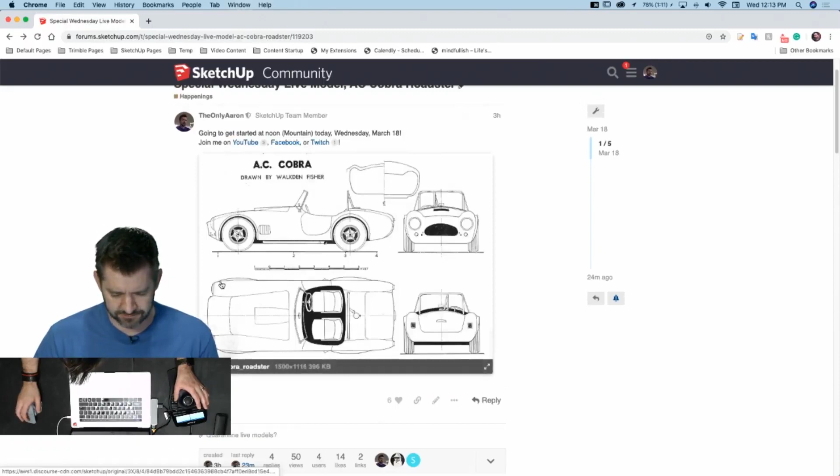So with that, let's hop in and let's model some stuff. I feel like I had something else really, really super important to say, and I forgot what it was. But well, we'll come back to it, whatever it was, at some point, maybe. I don't know, we'll see.

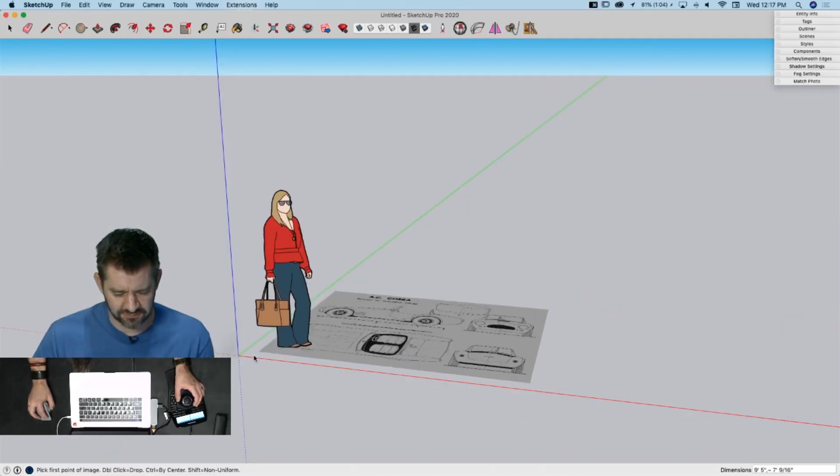All right, so I'm going to import this. I'm just going to put it in here nice and big. I'm not really worried about high definition image — this was a fairly low definition file to begin with, and screenshotting it didn't help that. So I'm not worried about optimizing or making this the highest possible resolution. All I'm really looking for is some curves, and I have some real basic dimensions right here. So this is good, this looks good.

I'm going to start by scaling it. I'm going to draw a line right here from 0 down to 6 feet. I'm going to group that line and drawing together, go into that group, use my tape measure tool on that line I just created, and tell it that is 6 feet. Resize it, yes — ooh, I was pretty close, that was a close one.

All right, so I'm going to take that now. I'm going to make a copy of it and go to the middle point. Option rotate to get it upright like this.

Option rotate here. All right, so these are really the three pieces that I'm interested in.

I'm sorry, Laura, you gotta go. See ya, thank you for coming by.

All right, so these are really the three views I'm interested in using. This is what will make up my image cage, my inference mapping here.

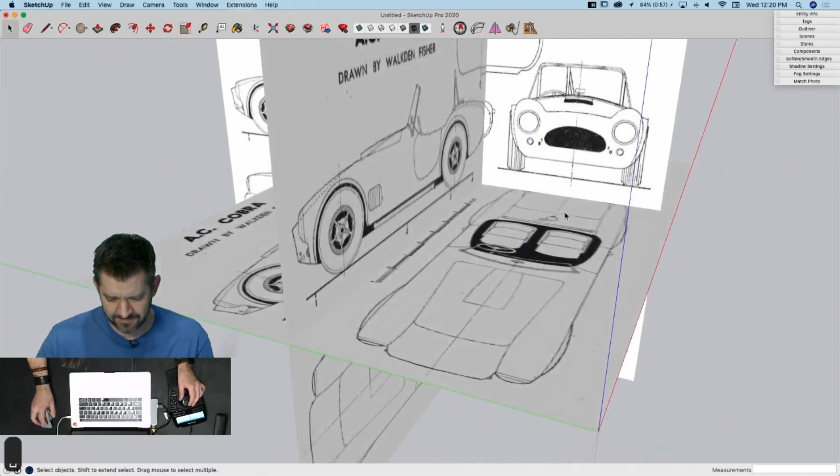What's that? I said, although it's still nice to be perfect. I'm a fan of perfection, I just don't like to require it of myself. I like to hold myself to a lower standard.

I'm going to take all of these images then, and I'm going to explode them. Oops, they're too deep, I'm going to explode them again, and that's just going to give me surfaces.

So with a surface, I'll just go grab all these, say intersect with selection, and now I can grab this one, make it its own group. Grab this one, make it its own group. This one I have to break a little bit more, like that.

Okay, and then I'll have to cut it off. Oh, I'll have to cut off a lot more. Get rid of all these extra lines then, because really all I want is those three pieces there.

All right, there we go. And I'm going to take all of these images and tag them as ref.

So I'm going to add, and this is just something I do, you guys have probably seen me do this before. That way it's real easy for me to turn those on and off as I start modeling, so I don't have to go toggle them or anything like that.

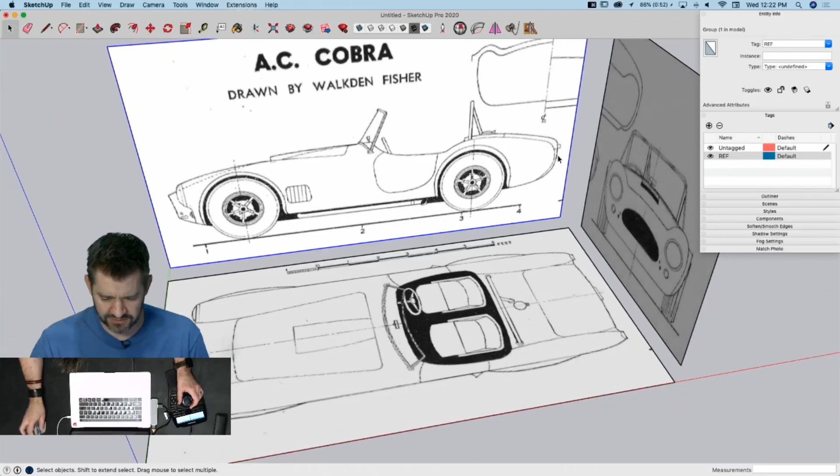Okay, so let's talk about the goals here. I don't really have a goal here, I'll be honest. What I'm really looking to do is, when I saw this, the cool thing about it is the body shape, right? It curves in almost every direction. Very cool, so that's going to be the challenging part, getting that body together.

Over on our forum, we did have a post from Tangle, who might be on here, he joins us on the live streams every once in a while. Tangle posted his modeling of, I don't know if it's the same one, nope, it's a Shelby Cobra. But he actually started from the frame and worked his way up.

That's impressive. I was not planning on doing the frame, to be honest. In fact, I'll probably get just enough to stick a wheel underneath. Like I said, my big goal is the body here. I think Enrock too posted that she was working on one as well.

So a question came up if I will draw this with quad modeling. You guys know I am a fan of quad modeling. My temptation here was to actually see how much I could do with native tools before I went into quads and started subdividing. Because I'm kind of feeling a little bit of what I felt with the fighter jet we modeled.

Very similar shapes. Sound isn't too good, hold on, I can make myself louder. I don't know if it'll be better. It's a little different this time because normally the room I'm in is insulated for sound, but I'm sitting in a garage this time, so I apologize if it's not as solid a sound as usual. I can turn up a little more, but I'm going into the yellow there, so yeah.

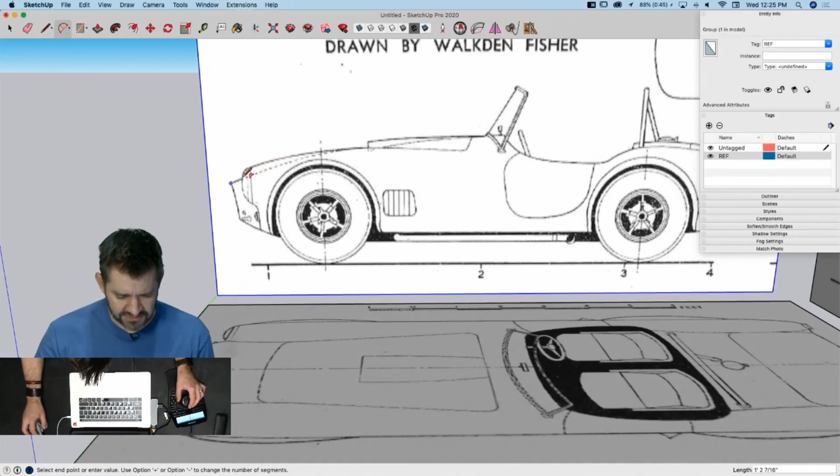So I'm going to go ahead and start by drawing the profile of the main part, this middle section. And you can see I fortunately have these real nice little dotted lines to follow. So I wonder if I should try to take that all the way back. Is that one continuous arc? No, not quite. So I'll go from here down to here.

Oh, I see it's not even a... okay, that's this piece right here that kind of tucks in and goes down. So we'll maybe cut that out. I don't know, we'll see what happens. Oh, so many unknowns.

All right, then this goes under to about here or so, and then goes straight across. Let's go to the middle of the tire. I don't know what's happening here. All right, and then this comes out to here, and then I'll grab an arc.

So this is probably, I would go about that far, and then this is where I would switch. I will switch to Beziers because Bezier is going to give me a lot more control over these arcs. And from there it looks like a little straight section, and then I will go to another Bezier, put one here, and go from here. I think I can do all of this in one curve.

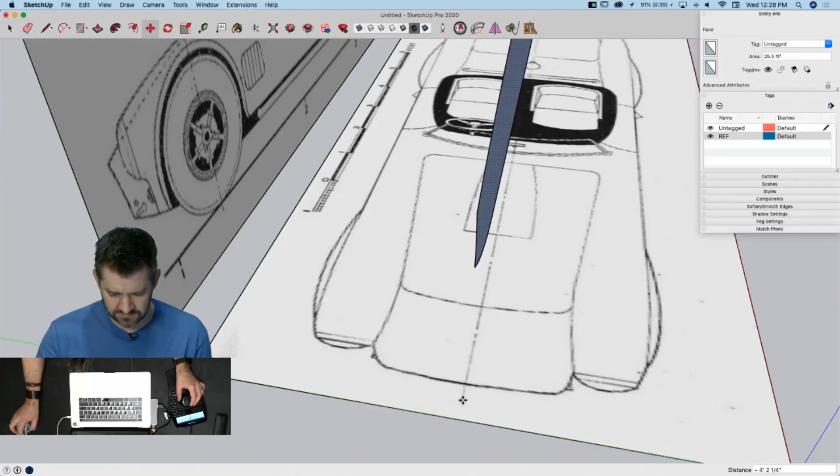Man, all right, so I'm gonna bring that over. Stick that right here in the middle. Okay, so what I gotta do now is I gotta get that to kind of billow out on either side. Yeah, that's pretty good. I'm gonna call that for today, we'll come back and fine tune it next time.

So yeah, so the next thing is to get this arc. So I see a couple pieces. So here, I'm gonna think out loud, and that is it, just because. That's that arc. Right down here, I'm gonna put a vertical line right down the middle. Here we got this going across like this.

Starts off that way and goes this way.

Bezier is great - I saw someone say they've never used Bezier before. It can be a little intimidating the first time you use it, and I get why not everybody leaps into it right away. But it really is a good tool that gives you a lot of control over an arc. You do have to play with it a little bit, use it to get the hang of it. The first couple times you use it, it's going to feel really awkward, like you're doing something wrong. I think that's just learning - that's not the only thing that's true for.

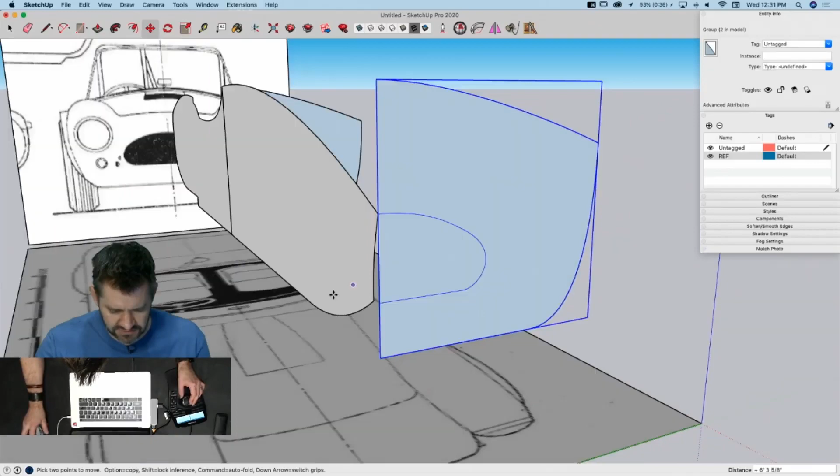Set your line color to yellow, that way you can actually see it. All right, that's kind of what we're going for. So this shape pulls down into this. But there are no - this is one of those 'there are no straight lines' situations. Straight lines are for the weak. Okay.

So a couple ways we could go about this right now. I'm gonna start by coming in here. I'm gonna extend the end so it's flat - we'll cut that scoop out at a later time.

Because I think what we might be able to do - let's see, I'm going to grab this whole set of reference planes. I'm just going to copy it over here for right now, just set it aside, because I'm going to take this and explode it all. Oop, not the images though. Actually, I'm going to take the images and lock them, that way I don't have to worry about accidentally selecting them again. So I can grab that and explode it.

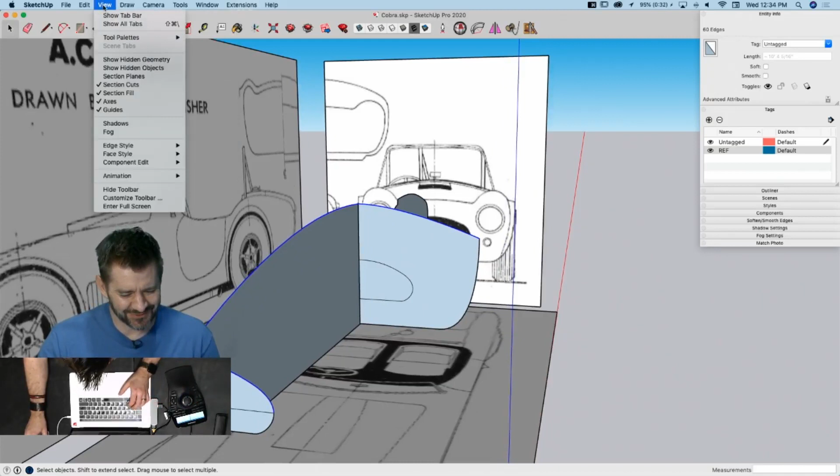All right, I'm going to grab all that. I'm going to go to my tool palettes, get Curviloft pulled up here. Let's just see what that looks like.

See, I need to get another curve. So if I go from here up to here, and then draw one more from here - not too bad there, so.

All right, and take that, I'm going to weld it, and then I'll grab it and move it from its end up to here, and then I will try moving this end here, and slide that over to here.

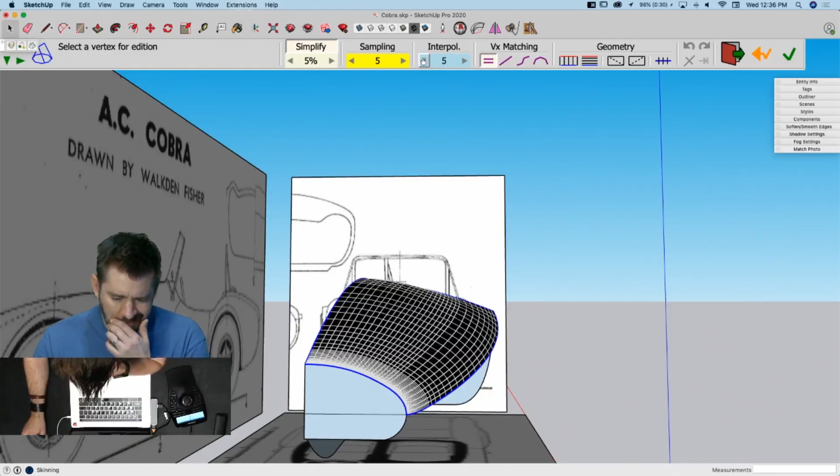See, what my concern is - what kind of a ridge is that going to get? Well, hey, this is a do-no-wrong situation, there's nothing that can really go wrong here, right? So I'm going to tell myself that. What's the worst that could happen?

Yeah, I'm going to grab that. I'm going to take this and just loft this all together real quick. That's a simple loft right there.

All right, and now I can actually take this point and explode that, and I'm going to move - oh, it's not touching, that's why. I was thinking there was an intersection point there, but there's not.

So maybe we can take this, drop that down vertically to where it intersects. There we go. And now grab that point, pull that out to the end. Same thing here - grab this, pull it horizontally. Cool.

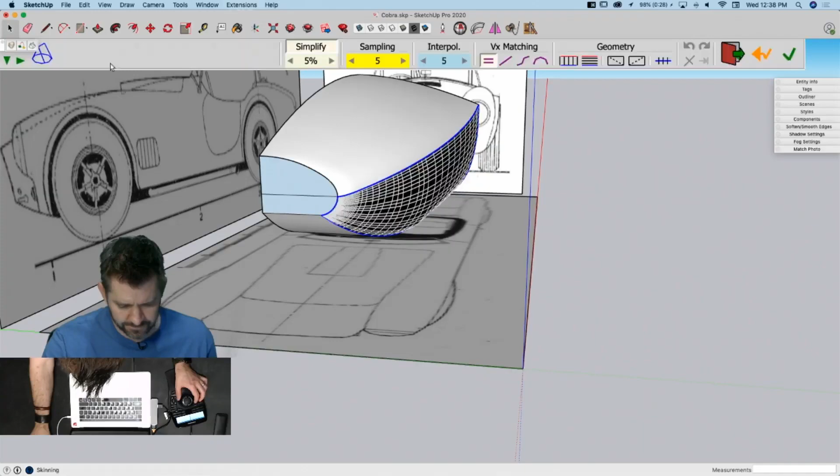Someone's asking how I'm making the shapes - I'm using the extension Curviloft from Fredo6. All right, that.

I think something is biting me right now. It's hard to tell though.

So this is sharper than it should be. I actually took my original profile and brought it down right here, which is this wheel well that pops out. The actual body itself kind of comes more like this and swoops down, so I'm getting this bit coming out where the wheel well will be, rather than all tying together into a nice smooth arc. So I got to get rid of a couple pieces here, and then see if I come.

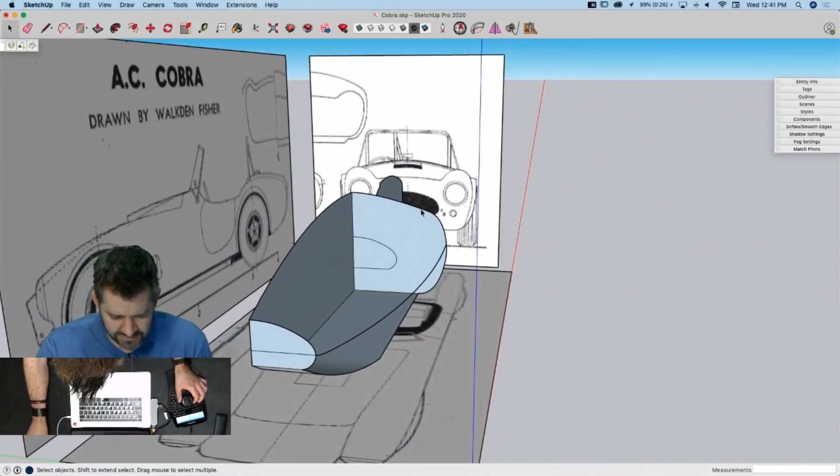We'll go make another. I'm going to join these two by welding them. These two, going to weld those as well. All right, so now I have 1, 2, 3, 4 edges that I can use Curviloft on.

And then same thing down here, 1, 2, 3, oops, 4, 5, 6. I didn't weld those. I'm gonna have to weld them though. This got messy right here. Actually, make sure there's no surfaces in there. There is. Something's just off. Look at that, a little bit off. There we go.

All right. There we go, weld that. And while we're here, we'll go ahead and weld this as well. Weld it all. All right, so now I'm going to grab those. I should be down to just 4 lines again. Curviloft it. All right, that looks better. That's more what I'm looking for there. Cool.

I kind of want this to... I'm not happy. I'm gonna take this line that I didn't like the way, as I was looking at it, it came up too pointy. I want to get more of a very soft curve. So what I'm gonna do is grab this line right here, bring it over here like this, give it a little bit of a turn like this, and move the end point over here.

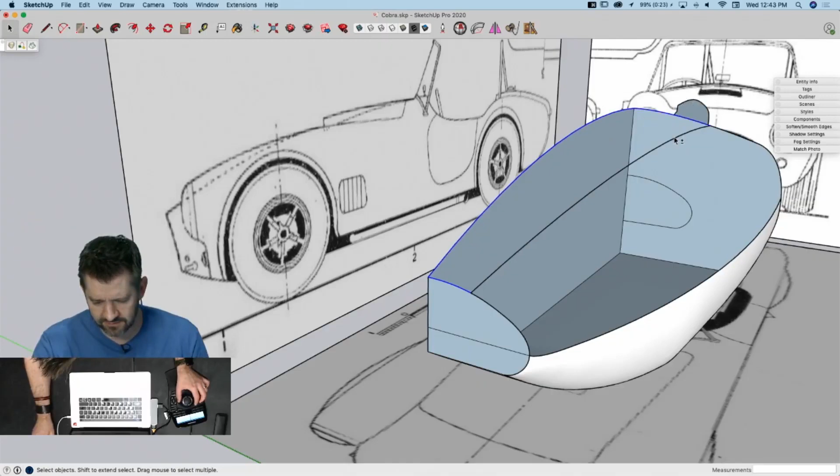Again, just kind of making a control cage for this loft that I'm about to create. We'll try that. That's better. I like how that comes up better in the middle. And then we'll do the same thing with this lower piece, which gives me an extra piece, but I'm about to merge it all together anyhow. That's better. I like that look.

Okay, I can't decide if this is looking like a boat or a plane or a car yet. I was gonna go with fish. This is more of a fish mobile right now.

So I'm gonna keep going with this lofting, with this curving, because what I really want to do is come put these next pieces on and start tying together and get the right shape. But I don't really want to break with this because this is a continuous line all the way down here. So before I hop out and start doing that, I need to come in and do this part. So I'm going to finish this main tub. I'm pretty sure tub's not a car term in any way, shape, or form, but you know what I'm saying.

I'm going to have this curve up like... All right.

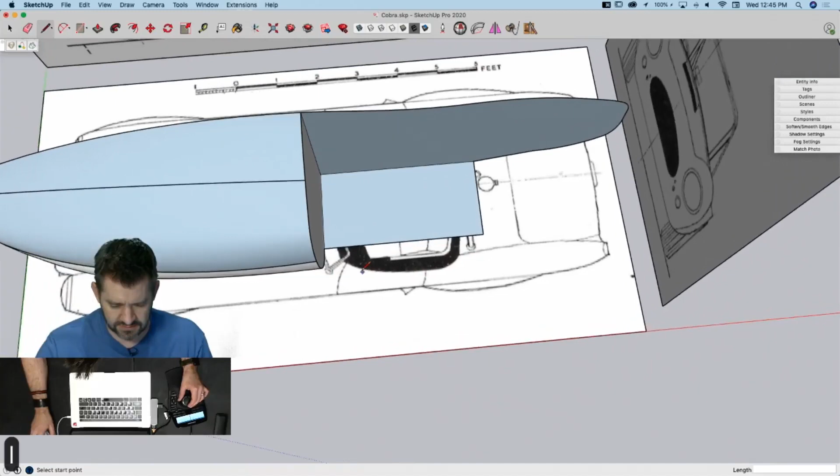Yeah, definitely still more fish looking. More fish looking? Okay, oh yeah, I get it. There's something fishy going on here.

All right, so I'm going to go from here to, where do I want to take this? I'll take this down a little lower. Like maybe, no, I'll go right in the middle because we'll keep it going that way. Whoops, just drew a line again.

All right, and then again I'll come try to come tangent off of there, fairly far back. I'm going to pull that curve kind of strong back that way, and this way I'm going to go just along the green axes and see how far I can pull it out.

No, I can't do that in a single arc. That's going to look weird if I try to do it in one arc. So here's what I'm going to do: I'm going to set up a plane to work on and take a line this way.

Like look, if you look at it head on, you can see how it kind of humps down. You can't even see the hood from side view. Oh right, yeah, my fenders will go above. So my fenders, these pieces will actually be up higher. So what I'll do is actually model both these fenders as separate spots, and I'll stick them on so they'll both stick out further on the side and they'll go up higher.

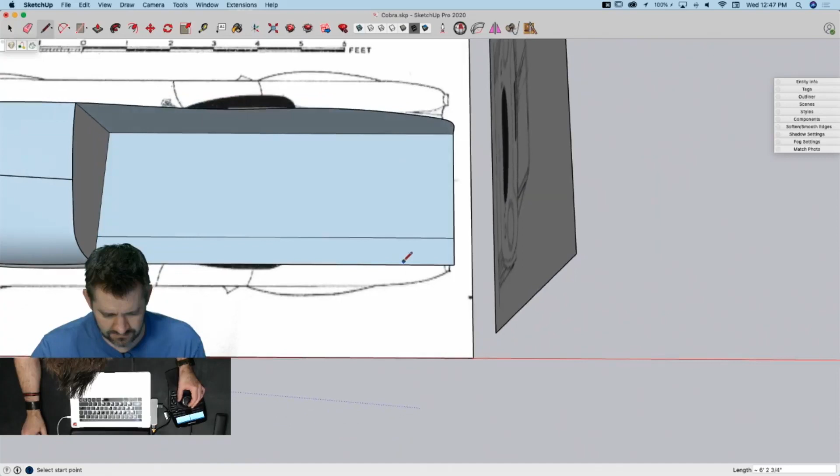There is a lot of confirmation that tub is an actual vehicle term. All right, cockpit is a car term. Cockpit is not a car term? Or no, cockpit and tub both work for cars. Hey, sweet. I'm about as far from a car guy as you can get, so well, I never have to tell you guys to excuse me for saying something dumb. You're prepped for it.

I'm going to go like this and try to pull this out as far as I can. Something like that. And then from there we'll go to here.

All right, so there's kind of the shape I'm looking for, we'll see how it goes. I don't know, I'm kind of feeling like I probably need to do the same thing as I did before, and maybe kind of come in intentionally, I don't know. I'm just gonna go for it.

See what happens. That's a nice thing about 3D modeling is there's really not a lot you can do as you're drawing something that an undo or a reload or something like that can't fix you from, you know? Go for it, hit the button, see what happens.

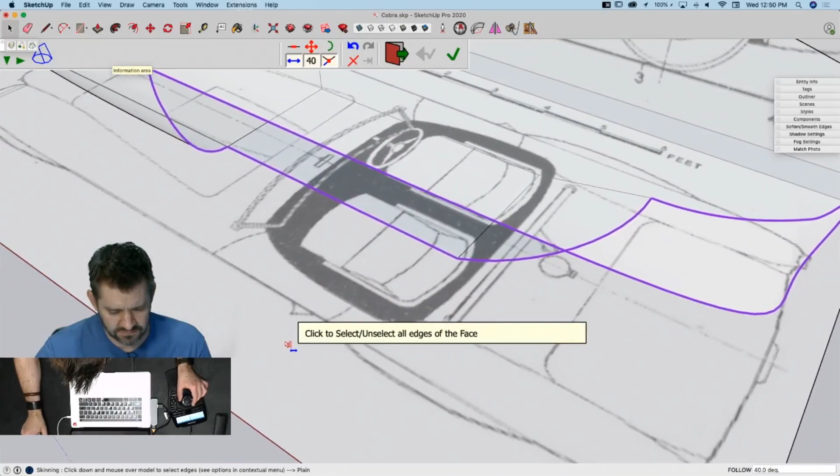All right, I should probably just clean this curve up. Oh, there's a hole in the other curve too.

Let's come in here and weld that real quick, make my selection process easier. Same thing here. All right, good, take that, weld it.

Oh, I'm slouching. I'm doing that thing, I'm getting close to my computer again. Apparently it's easier for me to model that way, I don't know. You're just trying to get inside. That's right, getting deep.

All right. That could be the initial body of the Cobra.

Have you saved lately? Just saved. That's my saving fingers. Command S, awesome.

It does look like a handheld vacuum cleaner. The Dustbuster always had that kind of tipped back look, that mouth looked very fish-like also. Apparently I got a koi thing going on because everything seems to look like a fish.

All right, I'm going to now grab all these pieces I just made. All right, all good, I'm gonna go ahead and explode them.

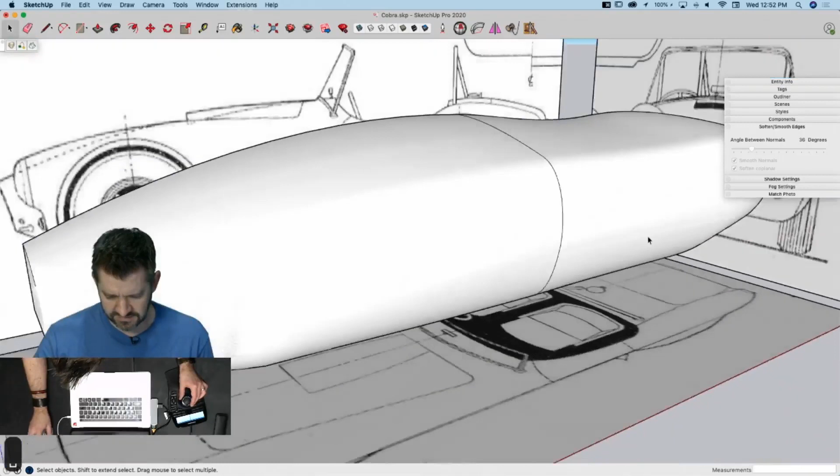Okay. Extra face in there, didn't need that. I think that looks okay. That's a decent start anyhow.

I'm going to grab all of this, actually don't need this. I'll grab all this, make it into a component. I'm going to call it a half tub, because I've been told that's the proper term.

I'm going to take that and... oh, half tub's not proper. Ah, dang it. Got confident, decided to fly a little too close to the sun there. Got burned, thanks Jody. It happens to the best of you. All right.

Guess this is a lot closer of an angle than I realized. Oh yeah, look how that comes out. That's cool. I'm not going to worry about softening it too much because I'm about to chop it off anyhow, so not a big deal.

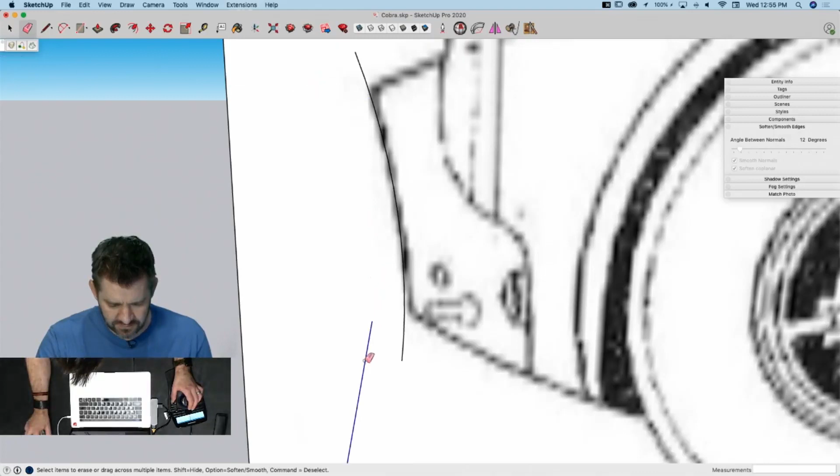And then what I'll do, just to make a solid that I can pull right into it, I'll do that, and then go like that. So that's going to give me that mouth shape. It should lap past it.

So what I'll do is come into one half of the component, hide everything else, also hide the other half, and then take this mesh, right click, intersect face. I can intersect with the whole model because there's nothing else here to intersect with, so I can just say intersect with model, and that should give me just that nice angled cut line. There we go, close.

Got some breaks there. My mesh is pretty fine actually, so maybe what I'll do is actually make this into a solid, and then try using solid tools, see what happens.

And then we'll just subtract that from this one, give it a second—spinning, spinning. There we go. The problem with solid tools, I didn't even think about this beforehand, is it broke the connection, and now Dave or Eneroth are going to hop in here and tell me I should be using Eneroth Solid Tools. You're right, I should.

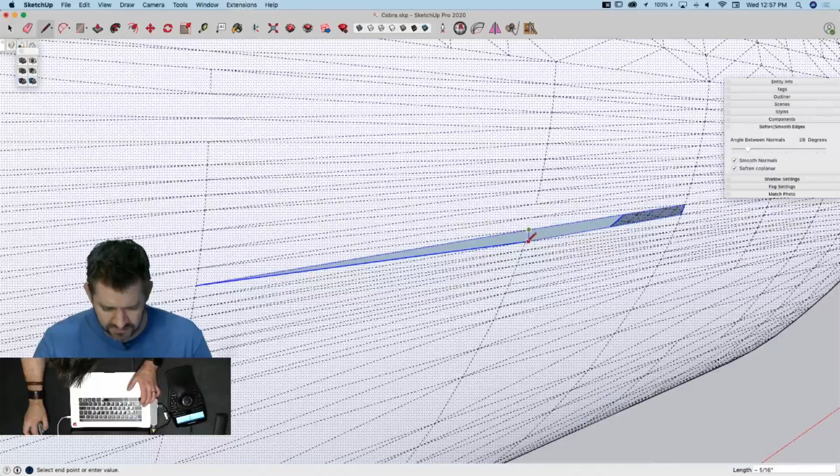I think the issue I'm running into right now is I made way too fine of a mesh with some of these pieces, when I didn't need to make this fine of a mesh for what I was doing. So that's why I'm running into these things.

At this point though, I could really grab the whole thing and scale it up, a la Dave Richards, and it would probably be in good shape. So if I run into any more issues, I will do that.

Now I'm going to take this and make it into a component, and I'll call it my half tub again, overwriting my existing half tub. Then, because it's got a face this time, this is a little easier because I can just use Curve Mirror to copy it on the other side.

All right, so that's what we got so far—that is our Cobra so far. I'm going to grab these, tag them separate. I'll go ahead and put them on a tub tag, then turn that off temporarily. And now I can come in and model this thing and this thing.

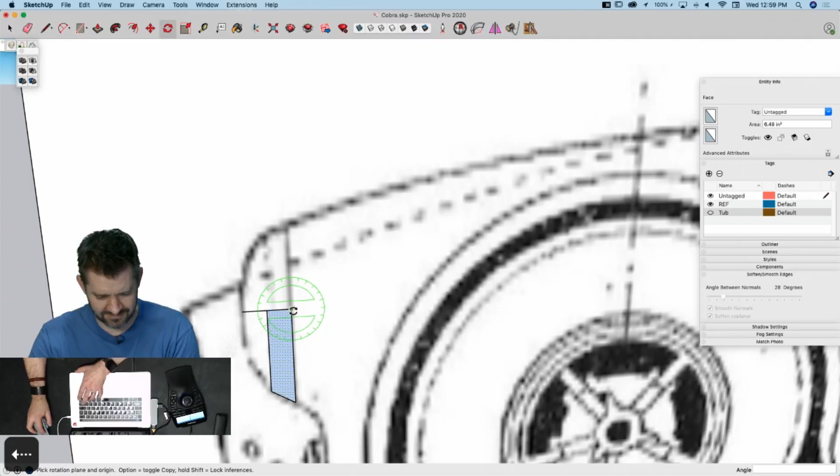Scale that down a little bit. Okay, I'm going to use Bezier again, I should get a shortcut key on that thing. Get my lines, and then go to vertical here, and then tangent to that one here. There we go, I'll take that, and same thing.

Eneroth did chime in and mention that her plugin actually struggles with short edges, so it might not be perfect for this. Ooh, all right.

Yeah, hindsight being what it is. It's funny because we do this on a weekly basis, and part of what we try to showcase isn't structured learning where I click this and now I click that. The whole idea is the design process, how I'm going to use SketchUp to solve the problem of creating this shape, and that's kind of what we do here. For me personally, that plays to what I enjoy, the design process, figuring out how to use the tools I have to create something. That's really cool, but every once in a while I think if I went back and did it again, it'd be so much better and take half the time. I never get to do that finished product, but hopefully it's getting you guys to the point where you get to do that. That's what I should be striving for, your accomplishments. Your win is my win.

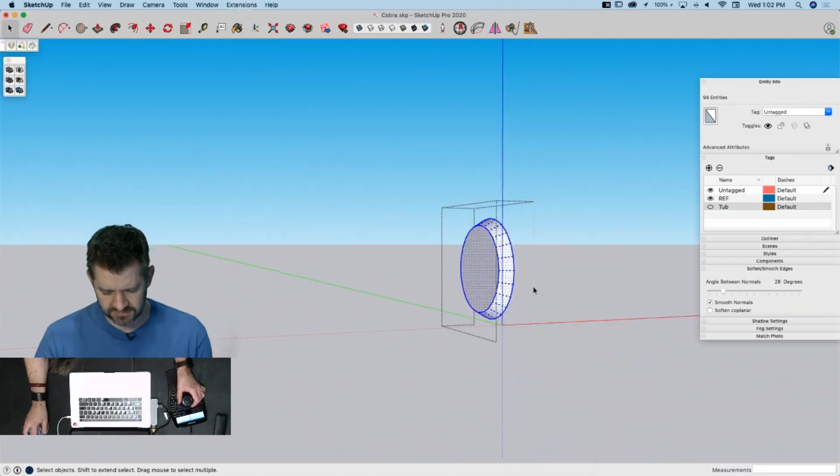Okay, what was I doing, reverse faces. The other thing I'm going to do while I'm here is grab just this back face, copy it, come out, and paste in place. That's going to give me a surface I can use as a place to start my curves for these fenders. All right, I'm going to take that now, grab by the end, come sideways.

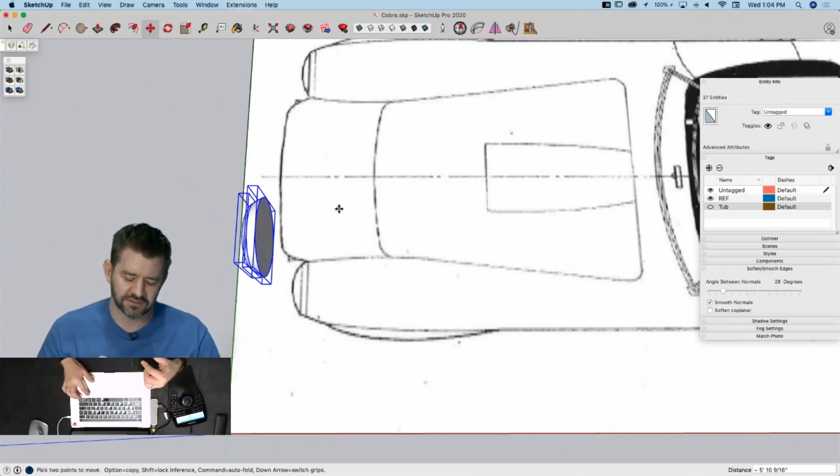All right, I want to ask you guys a question, I want you to be honest with me. Does everybody else still struggle to remember which way is green and which way is red? I've been using this for over a decade and I feel like I should get it right more often, but most of the time I hit one way and then have to hit the other. Red's been the same direction always, and in this model specifically red has always been here, but I think we designed that taking a cue from whoever invented the USB plug, because that's always backwards too. Yeah, 50% chance of plugging it in right. No, it's like 80-20 that you'll get a USB plug in correctly. It's always third time's the charm. Endless Fix is saying he's got colors, you can kind of see it right here, I actually have colored arrows, red is on the right, green is on the left. But my brain gets it wrong, it goes oh you want to go this way, okay that's red, no I mean green. I don't know, I guess I still mix up left and right on a fairly regular basis, so maybe it's all me.

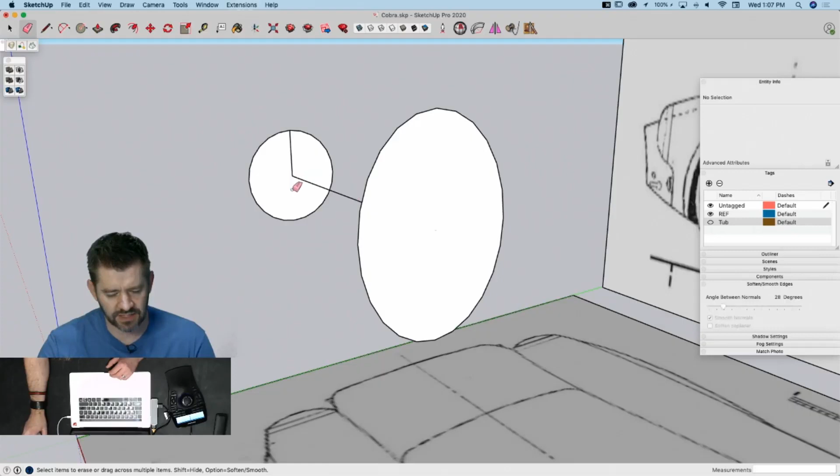Have you used that lately? Yeah, but I got it mapped to, where is it? What about - over, right here. What about safe? It's over here, so you guys can't see me hit it so much. It's a little subtle, oops, thing going on there. No, honestly, I really draw so much with lines. I think if you were to look at what I click the most, it's probably a three-way tie between L, E, and spacebar.

What am I doing? That's not gonna work. All right, so I had an idea and it failed. So I'm not gonna do that because it makes sense - it is a direct line.

So what I'm gonna do instead is create a single quadrant, and then draw an arc from this point up to this point. And then as I go I'm going to go vertically. I need a plane to snap to.

All right, so now I'm going to draw my arc. I can still use this image back here, so I can snap to this plane, but I can use my mouse to reference my image back here too. So where do I want to actually bring it up to?

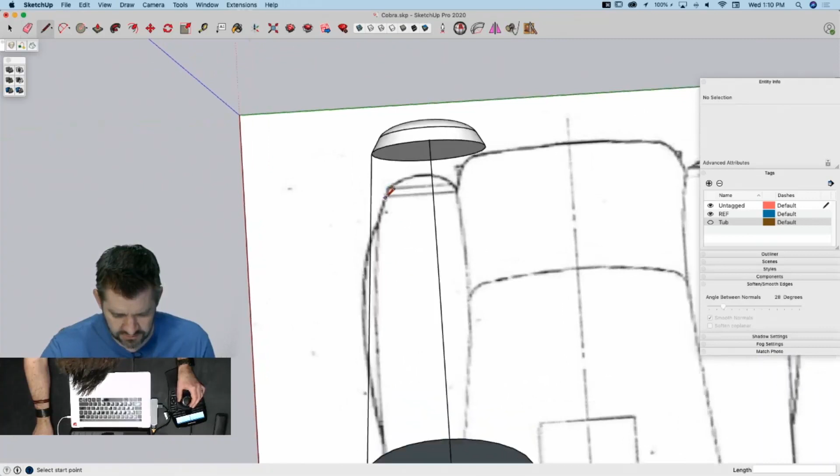Are you hitting a shortcut to go into standard view, or are you actually just staying in isometric when you're doing that? The view's right now spinning around. Pardon? Sorry, I had to think, and then sometimes I can't talk while I think, apparently. What was that? Words are hard.

It's fine, I know - are you jumping out to parallel projection, or are you? No, I haven't, I've stayed in my standard, my perpendicular or perspective - perspective, thank you. The whole time. I don't dislike - I know some people got a little bit of a problem with parallel. I personally don't have a problem with parallel, but I don't use it very often. There are some times where, yeah, reference images and stuff, I'll do that, but for the most part, I do almost everything I do in perspective.

All right, that should work. Sorry, I didn't mean to snicker, but that should work. I don't know, we'll see what happens.

So what I did was I just took the curves off of this side and this side, brought them on here to create the cage for that loft. So let's see - looks good. I'll take that now.

And because this is all symmetrical, I should be able to take that, flip it, stick it right here. No, something was not symmetrical. I'm going to keep going though.

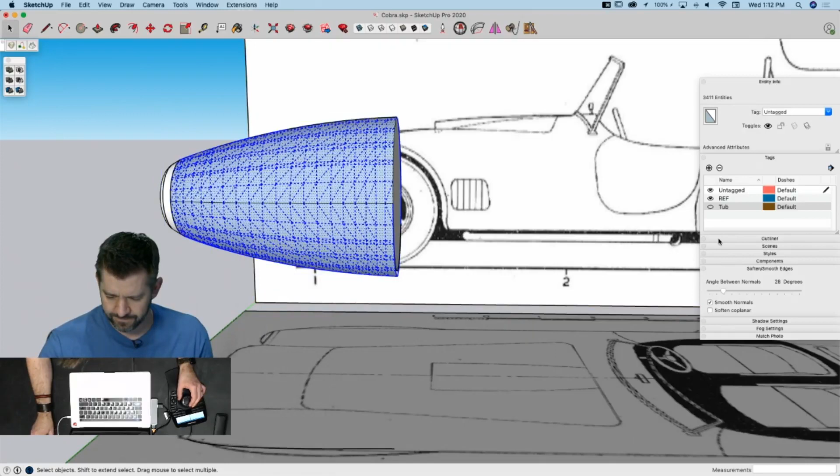Not sure what I did there. I was just off somewhere. Whoops.

All right, I don't really care how I get there. And then I can reverse the face of that. And then I feel like for right now, what I'm going to do is just kind of run that long.

So the other thing that happens is all of this has a little bit of a rotation going on. So it's just slightly like that.

Bring the tub back in. Okay, so that's not bad. That's kind of working.

I want this to kind of die back into this body. So what I can do, that's why I pulled this out long because I knew this wasn't going to be long enough. But what I can do now is grab this and see if I can. I don't know exactly how this is going to die into the body, but that's not bad at all.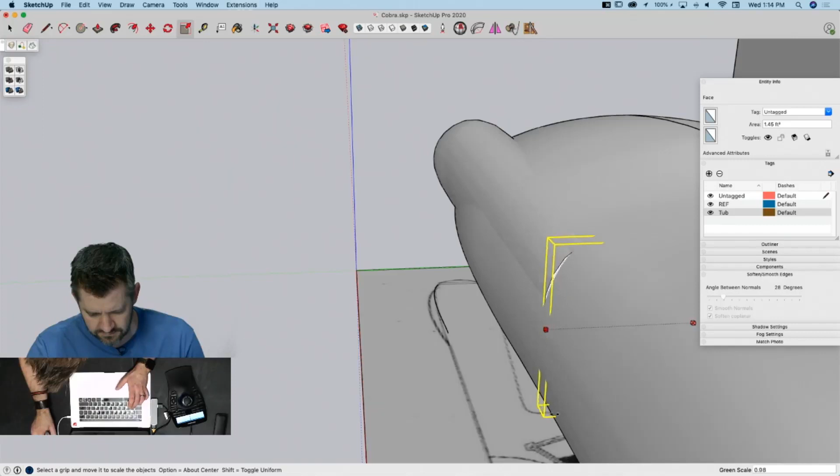Yeah, it looks like a frog. It does. It went from a real fish-looking car to a frog-looking car.

All right, I'm going to grab this surface. What is this? All right, I'm going to grab this surface right here. I'm going to try this. I'm going to see what happens.

Let's save. I'm going to intersect this face with the model just to see what happens. Okay, that's not bad. A little bit of cleanup right here, and I think we're okay.

What's going on here? What are you doing? All right, show me what's happening. Nope, don't want to do that. All right, I'm going to go ahead and do that though.

Okay, this was an unintelligent choice. All right, I'm just going to get away.

All right, so I had something weird going on right here. It was really the only thing I wanted to do. It was a reverse face, so I could have just come in here, reverse that face, and then, yeah. All right, we're good again.

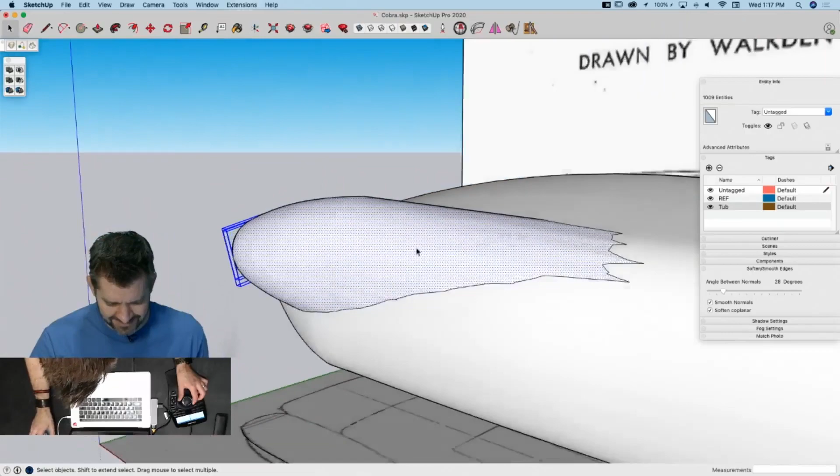Looks like something might be right there. Nope. All right, then I'm going to grab this surface and these two groups. I'm going to cut them. And I'll get rid of all this. This is just the leftovers. I'm going to go into context, edit, paste in place. All right, so there.

All right, I'm going to come in here. Actually, I should be able to, if I pop inside and look. Nope, I'm going to grab all of it, intersect with selection, may get me a couple intersections that were missing before.

So I can go in and delete that interior face and then smooth some of these lines out. Didn't quite work that way. Oh, I made a mess. Nope, nope, nope, nope, nope, nope, nope.

Command Z. Actually, this issue may have been here before. Yep. All right.

Again, I'm working too small, or too big, or bad things. Yeah, this is kind of like you inadvertently added flames to it. Yeah, I'm making a mess right here that I don't really need to have.

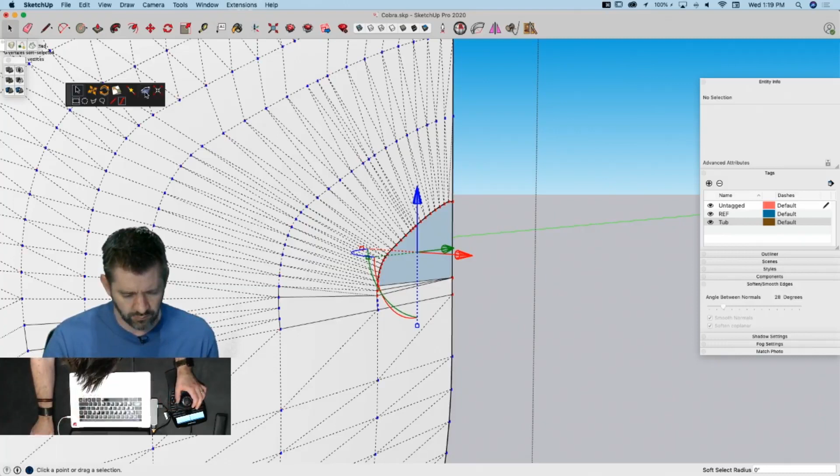Vertex tools has an align points button. So if I click that, it'll squish all these lines back so they're all coplanar again, and then drawing one line should close that up. It did break the mesh over here though. We'll fix all that.

All right, this is a cool thing because this happens sometimes. This is just like the mesh illustration, or mesh issue illustration. So if you ever go in and you smooth it all out and you still have these things, what this is indicating is that somehow SketchUp drew two faces on top of each other. So what you have to do is come in here and delete them.

Let me show you what they look like when I get rid of the lines. So if I manually go erase the lines, as I look around - oh, you can see it there. See that little light spot? That is an extra plane on top of a plane, so you can just select and delete that. Same thing there, and here's one up here. There we go, so now we're back to one smooth plane.

I don't know what causes it. It doesn't happen very often, but when I start to get complex meshes like this, I have a feeling I'm going to spend the next couple hours talking about how I should have made my mesh less dense. But I feel like I'm past the point of no return where it doesn't make sense to hop out and redraw the mesh. Maybe that's a different live session - we start having an hour after the show ends where you talk about your failings and drink beer. What I should have did.

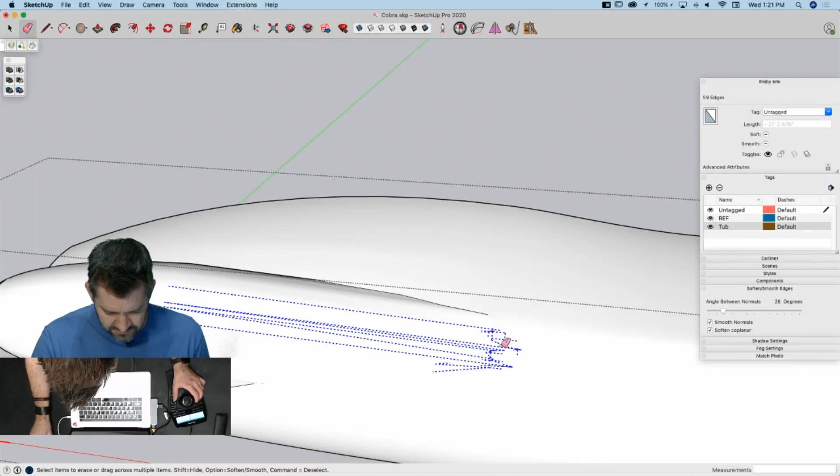I'm going to manually come in and just delete some of these edges right here, because I want some separation. Actually, it's not going to matter too much on this side because I'm going to bring the wheel well, or the fender, in to cover that up. And on this side, this is where the hood sits, in between these crevices. Okay, but that's looking pretty all right.

I don't have the back end, so I don't know how this ties together. I'm going to come into this one right here and just - nope, it's not there, it's down. That's not very informative.

Right click for a menu - oh, turn off short edges. Yeah, so one of the things that Solid Inspector will search for is short edges. It used to be automatic - when you ran Solid Inspector, it would look for anything less than a millimeter or so and flag those as a problem. Now it's a manual thing, so right here my short edge threshold is less than 1/8 of an inch, so anything less than that will be flagged. There was a question over on YouTube about how to have Solid Inspector check for that or not, and that's how you'd go about it.

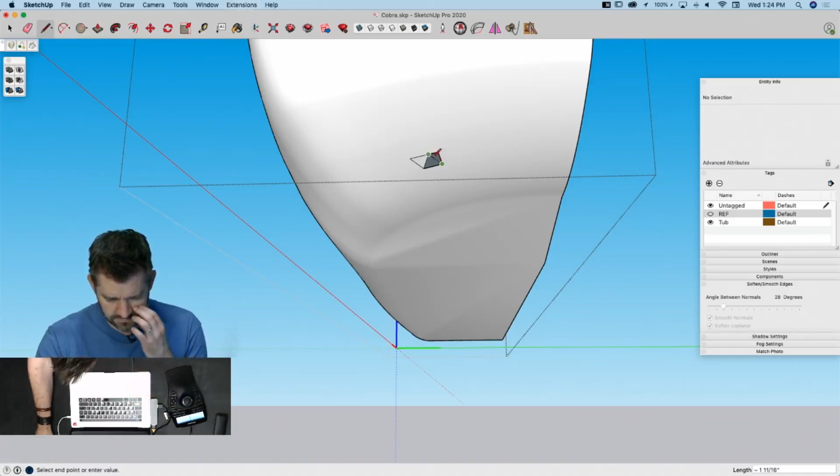Not quite sure how I would - oh, come on, man. Undo. All right, so this is okay, but I definitely have to pull this part down.

This definitely is supposed to come this way and kind of crease down. So, trying to think of what I would do to do that. Let's look at my hidden geometry real quick - yow.

Dave thinks it looks like a body pillow. I guess if you're really a car nut, that would be a perfect body pillow. That it would.

All right, so I feel like this right here needs to drop down. So something I could do is use vertex tools. I can do a soft select radius of like, let's see, 12 inches is too much - 6 inches. Let's see how that looks.

Take that line. I'm still having issues - I don't know if anybody out there is using a 3D mouse, but I'm still having issues due to the fact that I'm using the 2019 version. They just released a 2020 version, but I couldn't get it to work at all.

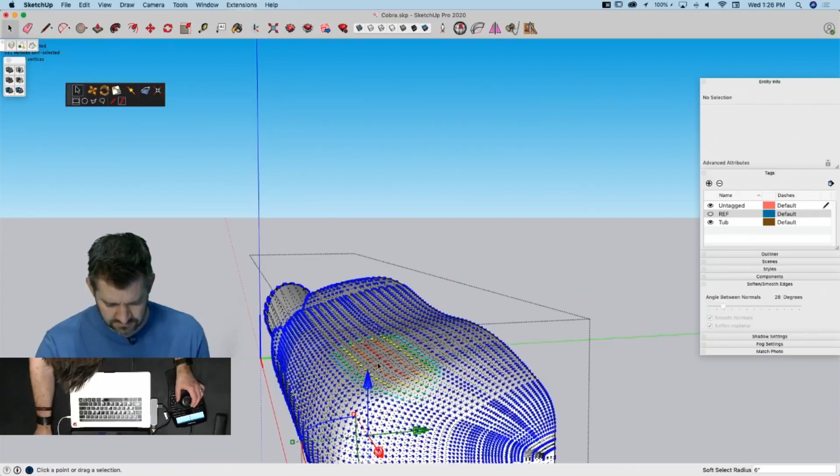There we go. Vertex tools is not... there we go. I'm gonna take that section, slide it straight down. That gives me that crease. Ooh, yeah, I like it.

Something weird happened right here, and I don't really care what happened. I'm just going to delete it and fix it. All right, that gave me more of the shape I'm looking for.

Obviously, it stops right here pretty harshly. But let's see, where does that have to go to? So it actually does need to carry up. Yeah, this is not the ideal way to do this at all.

So thinking maybe what I'll do is find a spot to break my mesh and just redraw this back end with fewer polygons, of course. And just trace around here to a point. There's a point at which I don't really want to mess with this anymore. I probably won't, I'll just go down to here, down to the flat section.

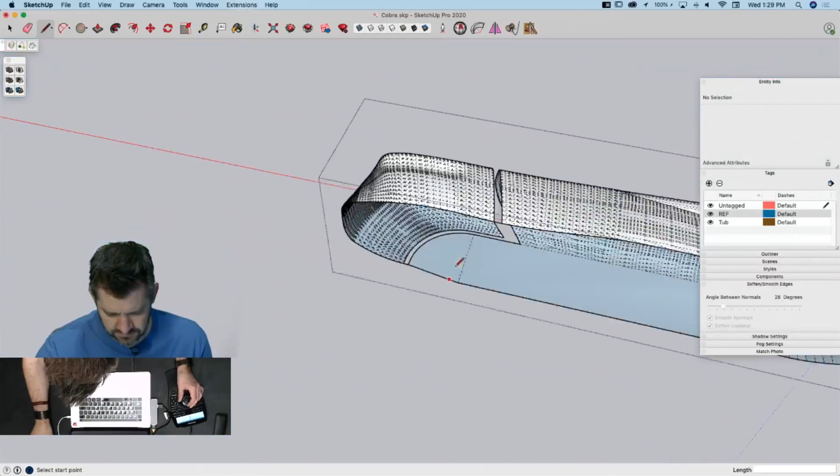There we go. And then same thing here. I can come around like this and just do some pruning. I'm doing some SketchUp model pruning, that's what I'm doing. Oops, put that back together. Yeah.

So if I disconnect, if I temporarily... I don't want to do that. I want to keep that section of my mesh. Break that. Let's see, break that.

All right, so now if I pick here, it'll grab just the surface and I can delete. The reason that that's important is I want to keep my outline right here. This outline actually worked pretty well. But what I got to do now is I want to come up with two separate volumes.

I have this volume right here that I want to kind of bring in like that. That'll tie back into this line right here. Oops, I go back in context. Reconnect that, reconnect that. And now, let's see, show the rest of the model.

Something like... all right, so from about here, I want to drop that lower. So that's going to go... I'm thinking what I'll do is actually take this whole line.

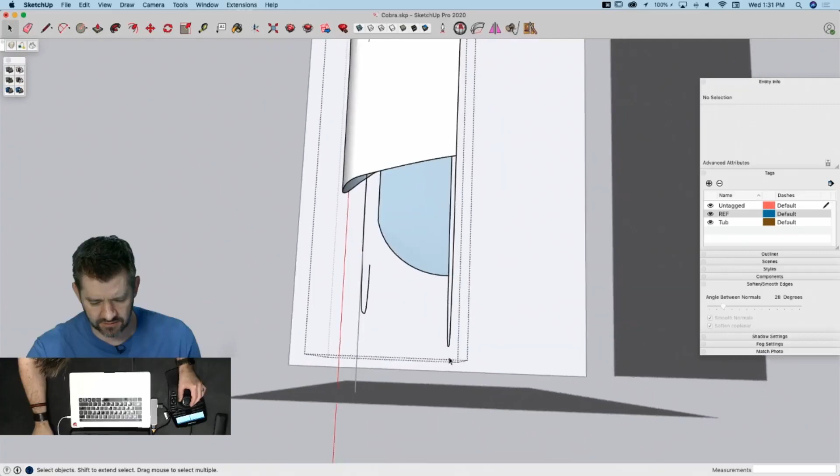Actually, I want to stay at the same height at the bottom. No, I don't, I want to bring that up. Like that. And then what I got to do, this is going to be the weird part, because I want to deform my outline, I want it to come over and come down. So right now it's not going to do that, it's going to come in a little bit. I think I brought that in a little too far. Yeah, bring that back out.

But I have to get this line to drop down. So what I might do is... I might create, where do I want to tie back in? So like there, maybe. Create a reference plane like that.

And now draw a new Bezier curve from this point to this point, which will be my dropped profile. All right, so this might not be perfect, but it's gonna be something. All right, let's try that, we'll see how that works.

And then all right, we'll give that a shot. So grab that curve, this curve, I have to weld this back together. I broke that up good.

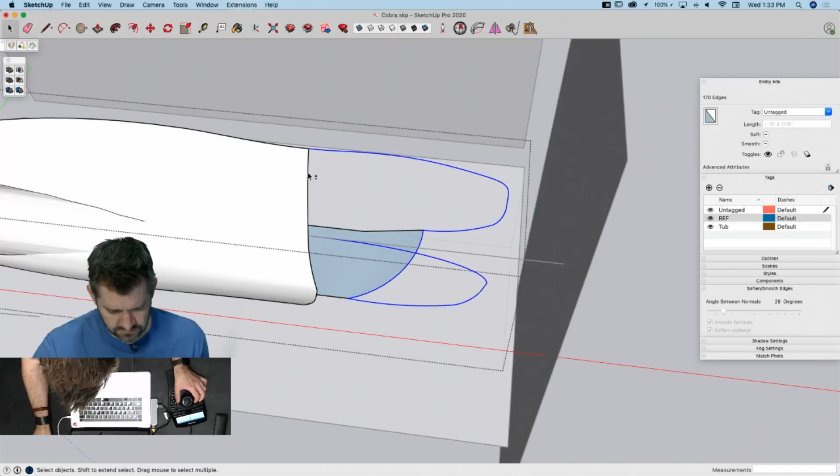While I'm at it, while I'm out here. All right, so we'll grab 1, 2, 3, 4, and try that. Did it just give up? It said skinning and then it said nothing. One more time.

Huh. So guys, I asked Curviloft to do that and it said it wasn't gonna. All right, let's see here. Not quite sure what's going on, but we'll make it work. Let's get rid of some things.

All right, I'm suspecting this as being a potential issue. Let's see what happens if we pull the bottom up a little bit. I can't have that, I got to at least put an arc on here. All right, so let's see. No. All right, good to know.

Well, let's try this. Let's ask for half as much out of it. Let's split this and try to do the top and bottom as 2 separate pieces. Oops. I don't know if this is gonna work. Let's see, let's see though. Let's just...

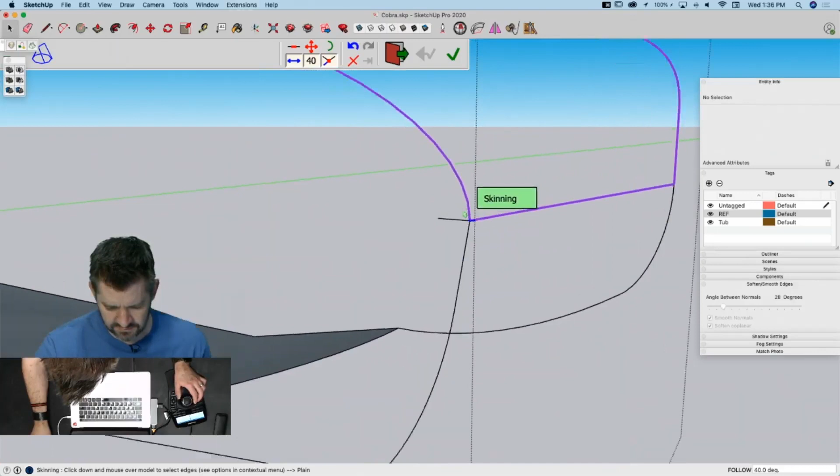Weld that back together. Can I do just the top half? Still doesn't like something I'm asking it to do. All right, what about the bottom? Can I get this done? All right, that's something. We'll take that.

Let's see, what do I do here? Well, guess we can try to sneak up from it and run it from the other side. That'll do it, right? Nope. Surprise, still didn't work.

What could be happening here? Any thoughts? Anybody got an idea? I'm not sure why it doesn't want to do this. Again, generally speaking, when I have a set of geometry like this, weld - Eneroth's saying more welding. I'm thinking you might be onto something.

All right, let's grab all that. Let's try to weld the whole thing. One big line. That didn't work at all. Okay, good to know. All right, let's try.

Zoom in here. Oh, whoa. I got an issue, I got issues, my friend. That may have been it. Let's see.

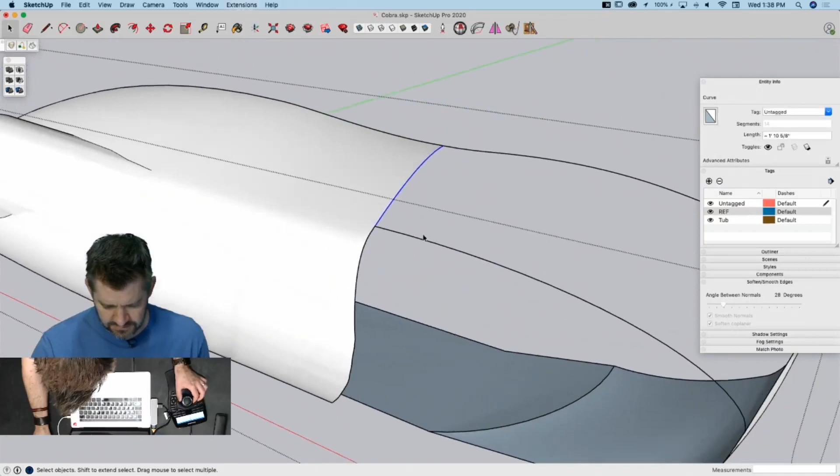How did this get broke? Oh man. Oh, because I tried to do that big crazy weld and just basically screwed everything up. Flew too close to the sun again, Jody.

All right, now we'll try this again. Weld that. All right, 1, 2, 3, 4 pieces. Hey! All right, all right, I knew it was gonna work, no problem. Save.

I need Eneroth's auto weld. Dave just told me. Yep, it does seem that that would be a thing to have right about now.

All right, I'll take this piece. Now I got to get that kind of a bulge thing going on the outside. I'll take that option, bring this over here somewhere.

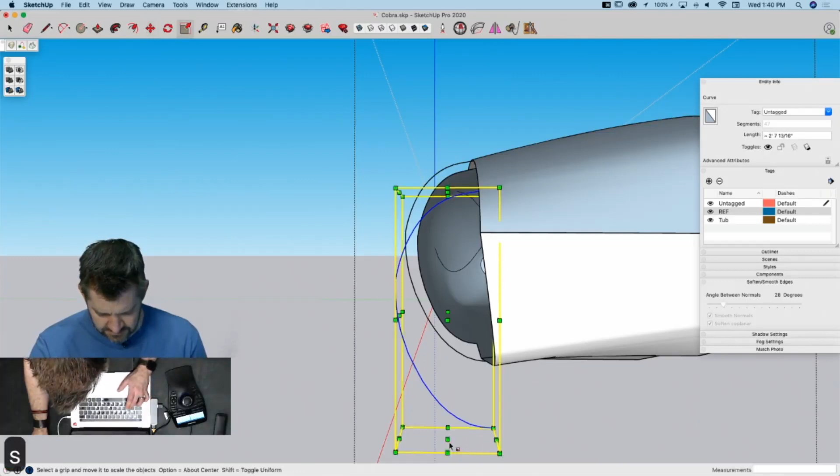And then get these endpoints. Just grab one - whoop, wrong one. There's that 3D mouse thing I was talking about. Weirdness.

All right. I don't know, this is ugly. I should probably draw new arcs - that's probably the smart thing to do. But let's see what happens when I grab - whoops.

Oh, all right, well we gotta explode this then. We'll see what happens right now. We just try to make this all into a new surface. Okay, not bad, not bad.

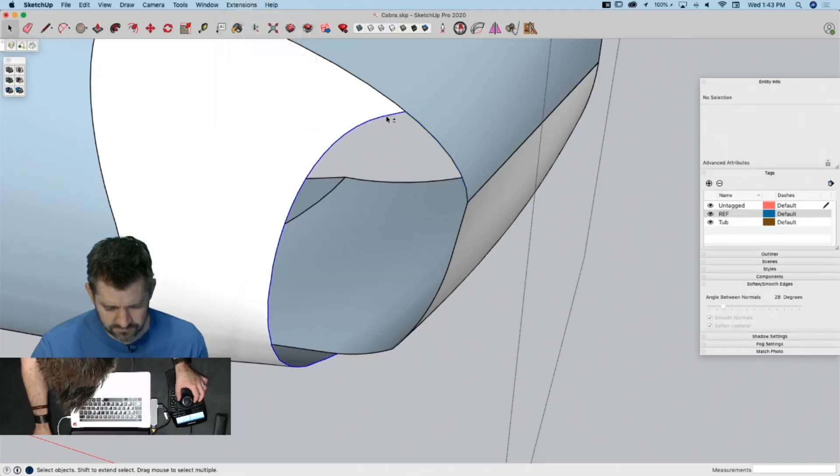All right, let's weld that up. 2, 3. Oh, gonna need to weld that up too. Weld. 2, 3 pieces.

Now let's look, what do I got? What do I got selected wrong here? Looks like it should be right. All right, that corner looks okay. If I select these two, let's check right here. Looks good.

All right, I'll try doing what it says and cutting that corner. No, still no good. All right, we'll cut this corner. Weld it. Oh, monster. All right, we'll try forcing a break on this one.

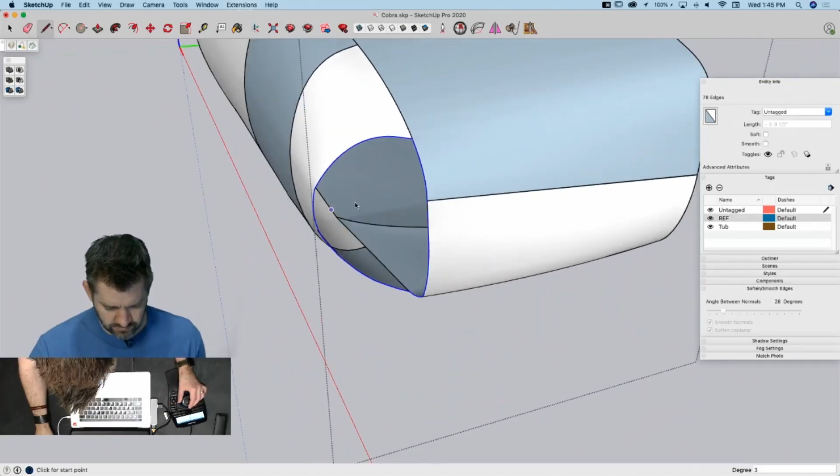I'm gonna draw a new Bezier from here to here, and I'm gonna put some new geometry in here. So I'm gonna try to follow a geometry right here coming out - that. There we go. Let's see what that does to it.

Click here, click here, click here. Skin that, beauty. Click here, click here, click here. Skin that, oh, also beauty. All right, we got that little bump out there we're looking for.

This is not the smoothest transition. This is horrible. All right, well, but I could do something with that too, right? I can - hold on, what can I do?

Okay, I can't do anything until I explode some geometry, so. Whoop, no, don't undo - it's all falling apart. Lost Jody. Got this weird crease in my fender.

It's all garbage. All right, I'm gonna take these guys and explode them, and then free up some geometry. I don't like any of this. I want to get rid of all this and all that.

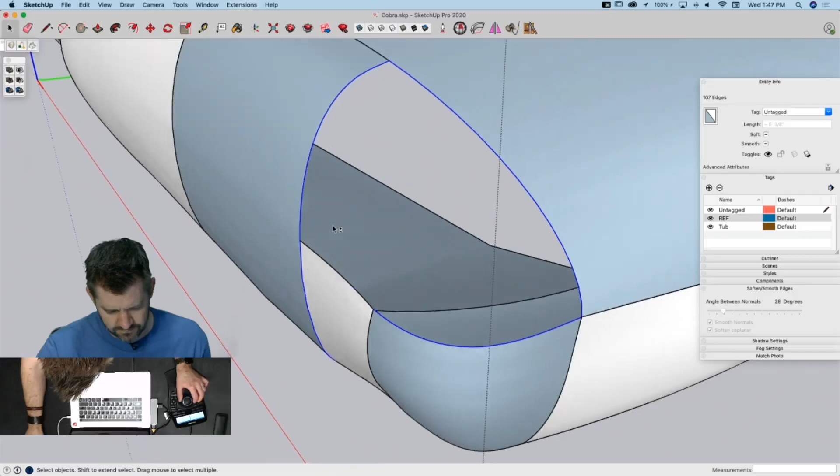All right, weld that up. That's good. This one needs to be cleaned up now.

I have to check out that auto weld. That sounds pretty nice right now. Oh, that's better. Look, I'm going to go so far as to say that's exactly what I want, and that's what I'm using.

Explode all this. Orient my faces here. Uh-oh, got some issues. Huh, wonder why that's happening.

Closer. Something's not right, in case you guys hadn't worked that one out. All right, I'll come back to that mix. I'm about to throw more geometry on here, so I'm gonna mess it all up anyhow. I will come in here and do this.

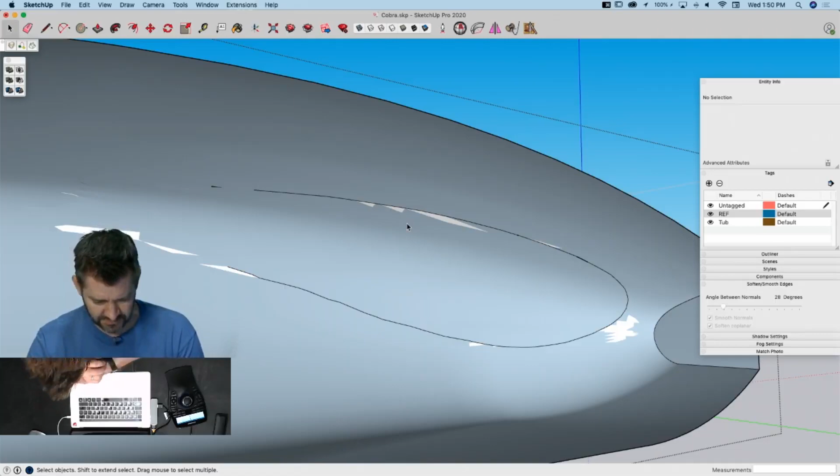And then grab all these lines, and I'm just going to manually go in and soften and smooth them. A big part of the issue I'm running into, at least some of it, is this right here, which I said I was going to deal with later. Still don't want to deal with it. If I'd left that as a solid, it probably would have been better.

I'm going to do this. I'm going to take a copy of this component. I'm going to stick it over here. Scale it up by 100. Select it all, intersect face with selection.

See what that does, and then do my cleanup on this bigger model in hopes that my smaller model gets cleaned up.

I rushed into it, much like proposing yesterday that we should do an extra live stream this week. I may have rushed in a little too quickly. And where's Jody at anyway?

Man, all right, well, hold on. Let me look over here and see. Actually, let me treat you guys to something, this is kind of fun. Let me show you, I'm going to give you a little tour. So we're going to switch over. Forgive the black and whiteness, but this is the only other camera I have.

So if I go a little wider here, you can see this is kind of our setup. And let me show you where Jody's at. So right over here there's the extra monitor showing what's on my screen. And then right down here, to come around a little bit, there we go. That's Jody. This is the high-tech solution I was able to come up with on the spot.

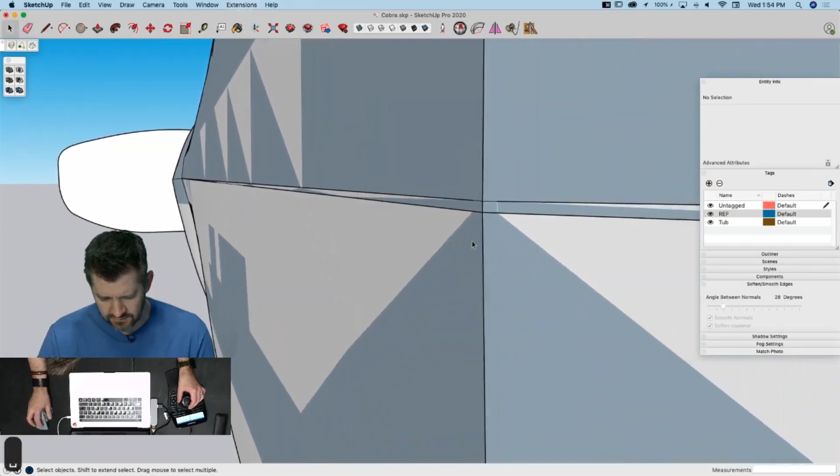And there we go, come look at what I got. Yeah, so see this right here, these two pieces. Oh, so that was even further back, I don't even know when this happened.

Oh, I didn't undo enough. I keep undoing till there we go. Okay, now I got my separate pieces. So, oh no, see that happened even before that. So this probably happened when I merged this, and I did something that caused this break right here.

So what we can do here is clear out. If you ever end up with this, I guess I'm trying to find the glass-is-half-full view here. Oh man, that's ugly.

If you ever end up with something like this, you can do stuff like move points in meshes around, that's a possible thing to do, so you can force stuff to be restitched together. More often than not though, the quicker solution... but like I said, if you're looking to do just a little bit of knitting, sit there, relax, enjoy yourself, hand stitching is a great solution.

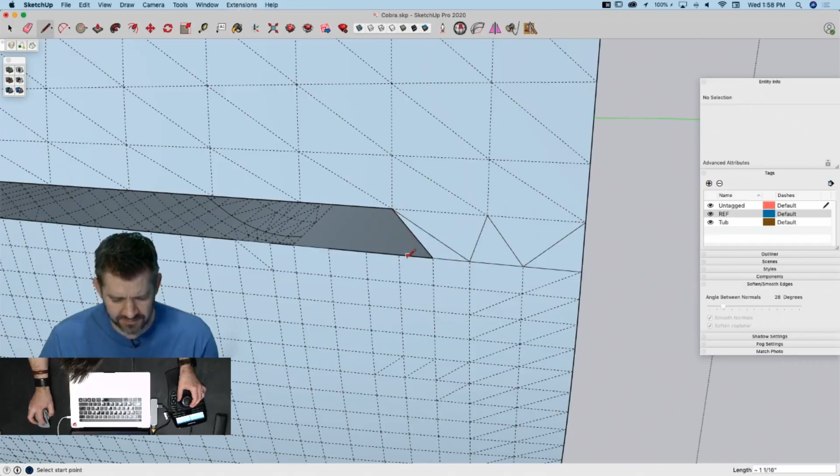Because I usually don't think about how dense I want my mesh. Every time I use Curviloft, I just kind of tell it to go ahead and do whatever it wants to do as long as I get the shape. I think what I need to do is be more conscious of the mesh that it's going to create, because I don't need near this fidelity in this mesh that I have right here.

This is my learning opportunity. I've learned something here today. So that's got that going for me, if nothing else. I've learned a thing.

So this is something else. I'm trying to do my best to take advantage of this drastic change to my daily schedule. All right, let's soften that up. And I'm going to do something that I've been meaning to do for literally months, in the last year, and that's spend some time with the tablet, get used to drawing with that tablet, and see how that goes. So I actually have time right now on my calendar.

I forced myself to add time, and I have a calendar entry that just says model something with the tablet. So I'm gonna spend a couple hours on tomorrow, try to optimize workflow, and then next week, I don't know if it'll be Friday or maybe we'll do another one of these during the week before Friday, I'll actually come in and we'll do some modeling just with the tablet and get just, I don't know, put this, my baby, my mouse that I love so much, put it somewhere that I can't reach it and force myself to draw with the tablet. So it'll be fun.

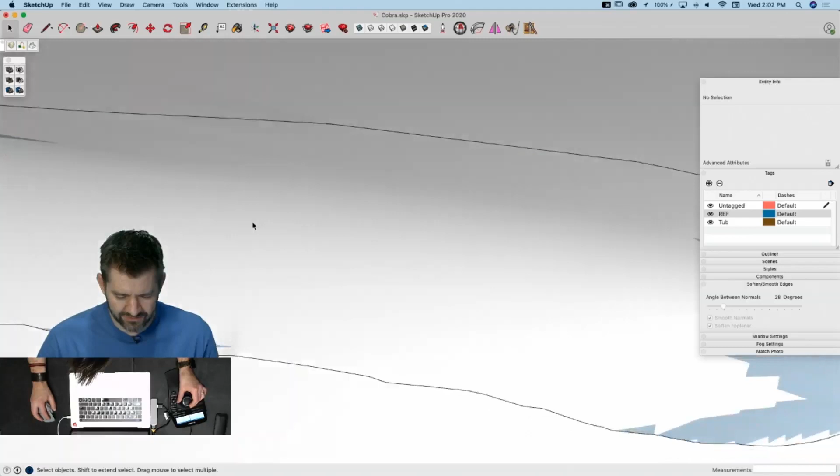So the other thing I was about to say is, I didn't do it. What I should have done was when both pieces were solids, I should have done an outer shell or a merge. I could actually still try an outer shell. Let me try that. So I'm gonna take these two and add them.

To the ref layer temporarily. Get rid of them. So, it's too late to do that anyhow, that's right.

So what I was saying is I really should have used solid tools to join this together, because what happened was someplace there was a break that was too close to the edge of a mesh, and SketchUp's made for architectural modeling. So the fact that it goes down to 0.001 inches, I think, is already pretty small. So there was a mesh smaller than that, and some math thing happened where it left a gap. So something did not break this mesh all the way. The solution really would have been, at the time, to go in and use solid tools instead of just intersecting, which is what I did.

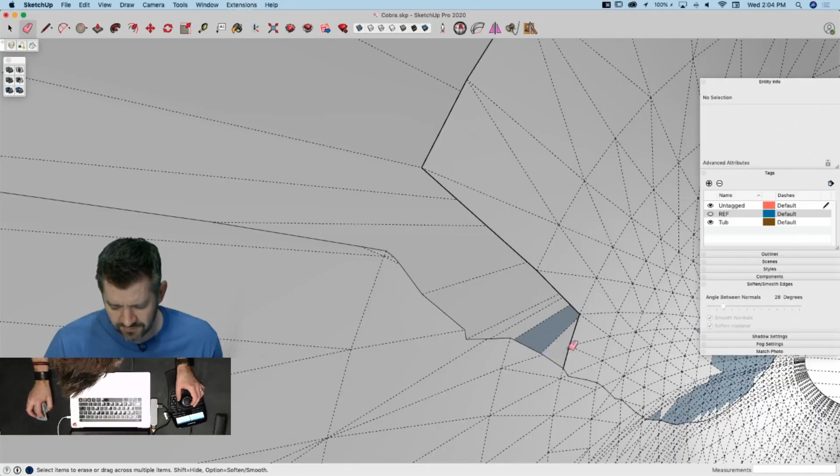Again, I'd like to think this is not a lost illustration, because I know I've hit this before, and the bigger solution, the thing I would have learned or would hope to have learned for next time, would be, as I made all those solids, to actually set them aside, and then I could have just redone the whole merge. But I was on a run, I was just going. I get so excited to model things in 3D that sometimes I don't always plan that well. You guys ever hit that? Please say yes.

Oh, okay, so we're almost back around already. I need to figure out where we're at now. We're about 2 hours in. So yeah, we have less than 2 hours of modeling. Not in a bad spot.

I got to figure out what I want to do. Like what's my goal here? I'm thinking where I would feel good having just the body would be to get the fenders on there, and then maybe carve out the cockpit. I still don't believe it. I think you guys are making fun of me. I don't think that's real, that's not the real term. Maybe it is, I don't know.

So as I spin around here, here's a notification to me of something else going on. See how I have a profile line right here? That means these two pieces aren't properly broken. So yeah, when I break it, see, it leaves that hole in there. So I might have to come back and stitch this up.

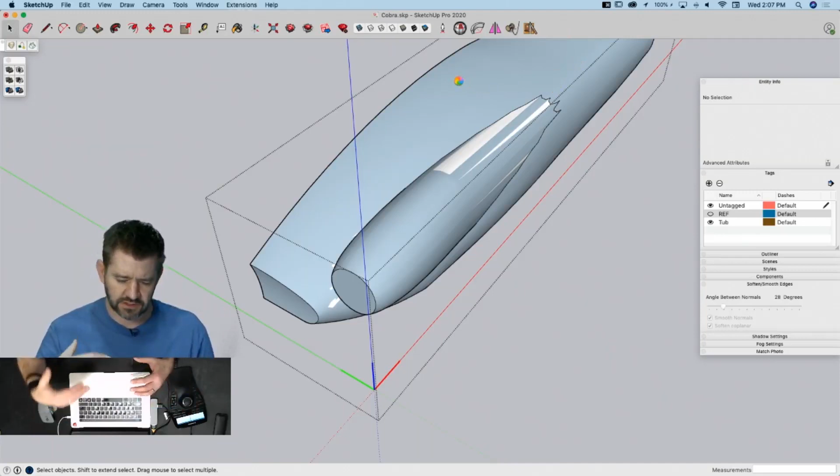Out here, something's going on not right. So I think I'll go in, plop wheel wells front and back, scoop out where the cockpit's going to go, and that might wrap up. That might be as far as, there we go. We are back to, is it even a solid? I'm not going to push my luck. Not that worried. All right, so if I grab this, I should be able to re-soften this.

All right, cool. So let's get our reference back on here. Oh, I should probably actually come in here. One last thing, get the right side facing out. Don't want to work inside out.

And then we'll get some wheel wells on there. Maybe do a quick follow me tire wheel to put on there. I'm not sure what's going on. I don't know what's happening anymore. All right, there we go. Reverse faces.

All right, so let's look at what this thing looks like. Here's what I think I'm going to do. I think I'm going to draw this wheel well as a full circle. Start right here, bring it straight up, like that.

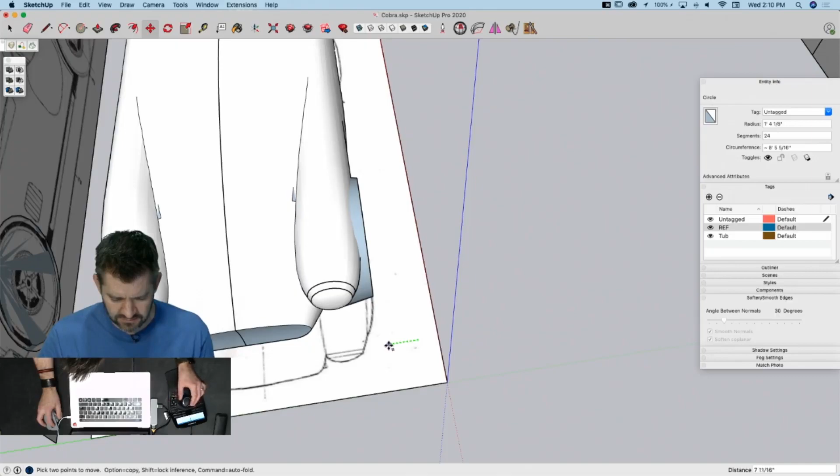I'm gonna make that bigger. Scale this up even more. And then push just that back in there. Let auto fold. Nice.

How does that all happen in the front? See, then, so this was the thing. The other thing I was thinking, if I wasn't having so many concerns over what's happening right now. Concerns, that's a nice way to put it. Let's shrink that back down a little bit like that. What actually is going to happen is we're going to have a whole nother loft here at the bottom to tie this all back together too.

So I was actually thinking of coming in here with a surface and breaking that and then doing another loft to clean that up. Right now I might just be good with this. Get that like that, there we go. Now I'm going to take that,

intersect it with the model, or intersect it, excuse me, and then get rid of that piece. I don't know what that is. Huh. Oh, that's leftover geometry. Oops.

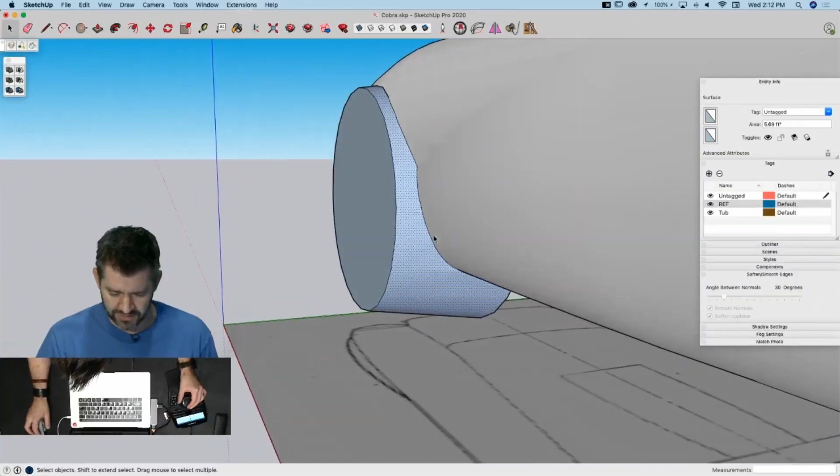All right, so there's a little more cleanup to do, but all right, so this wheel well's in here now. You know what this means? This means we've gotten to the point where Aaron is making his version of a well-known actual real-world item, because I got to wrap this up in the not too distant future.

So I'm going to do something like this. I think would work. All right, here's what I'm gonna do. Same thing here. Show me my hidden geometry. There we go. Oops. I lost it, lost it all.

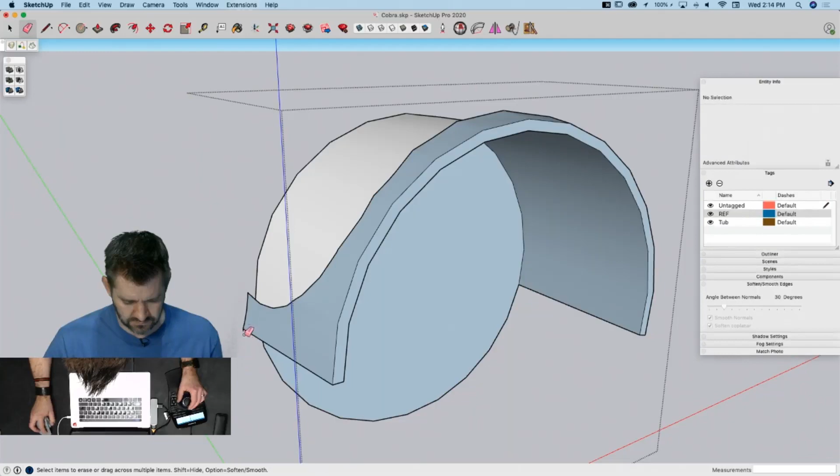I'll take this, make it a group so I can isolate it. Come in to edit the group, I can hide everything else. There we go, that's good. Cool. And then, right, that's going to be my wheel well for now.

Reverse the faces, and then I'm going to take it. Actually, I'll take it as it is as a group. Cut it, and then go in here. That'll give me a wheel well on both sides. And then, I wonder if I could take that same geometry. I'll have to

doctor it a little bit, but I think I can. That was kind of wishful thinking. You know, I could do this. If I get rid of this surface, I can pull that back through, and then I could grab that. Oop. Nope. That's ugly.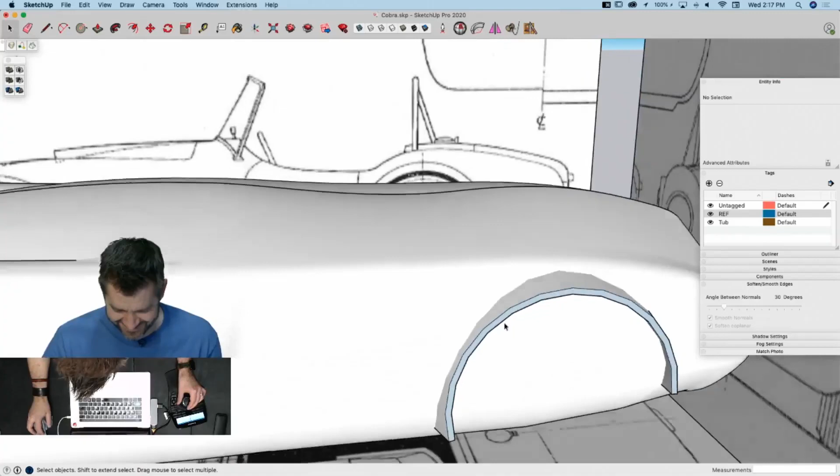The other thing I do. Let's see if I can repair it this way. All right, it's serviceable for right this second. All right, because I think I can cover up a lot of that with a well-drawn tire. Nice big wheel well and a tire should really fill the whole thing out. So if I come here, go like that.

All right, I'm going to draw a quick wheel profile. And see, I actually have kind of a good reference of what the tire actually looks like. So, oops.

I don't know why, but I feel this urge to make these as low polygon as possible after everything else that's happened with my design thus far. It's also heavy.

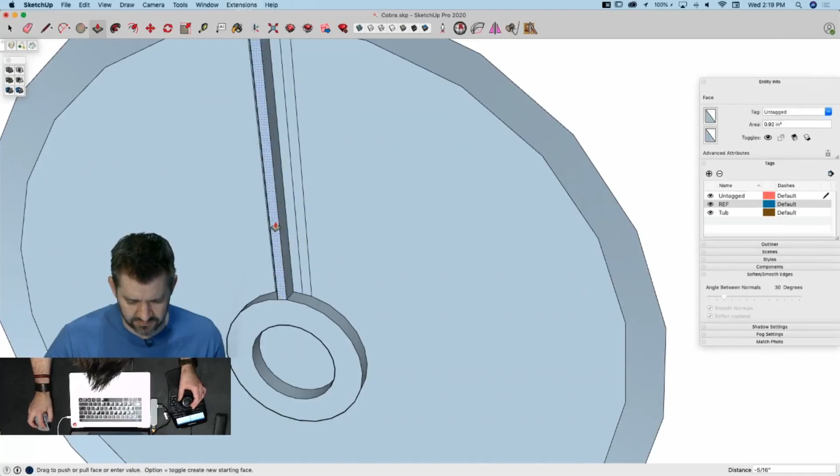Some spokes? Are they still called spokes if they're on a tire, like a car tire? I can call bike spokes, I know I got no problem saying that, but just wondering if that's the same thing.

I don't know, I'm making up a thing here. I don't know what's going on, but this is what it's going to look like. Basically, I'm just... none of this is going to work, though. Undo, undo, undo, undo, undo, undo, undo, undo. Let me close this hub back up. There we go.

All right. Sweet hub design, man. Okay, I'm gonna take all of this. Quick, what's 360 divided by 5? I know, I could have downloaded it.

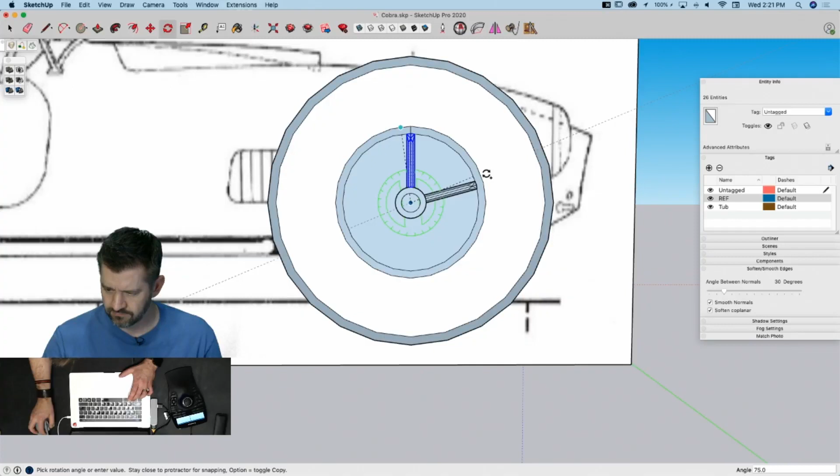Thank you, Enrot. All right, I'm doing it. I'm sinning.

All right, so now that's true. That would have been a solid way to fix that problem. Awesome.

I know the back tires are wider than the front tires, but that's just the beginning of the things we got going on back there. All right. It's okay, it's all right. It's not there, but it's all right.

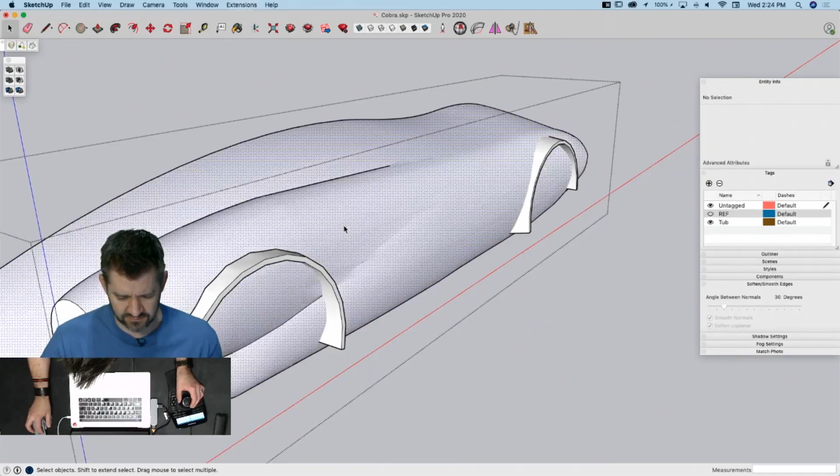So with Solid Inspector, I can find where my problems are by hitting Tab. It'll close up on them, generally.

Oh, there it is. Where? There. Oh man, come on. That is a seriously small hole in a mesh.

All right, let's check the rest of these real quick. I have a feeling the same thing here. Yeah, oh, little tiny thing. I guess this should illustrate just how very, very important it is to pay attention to things like how many lines should a curve be made out of. Obviously something I took for granted.

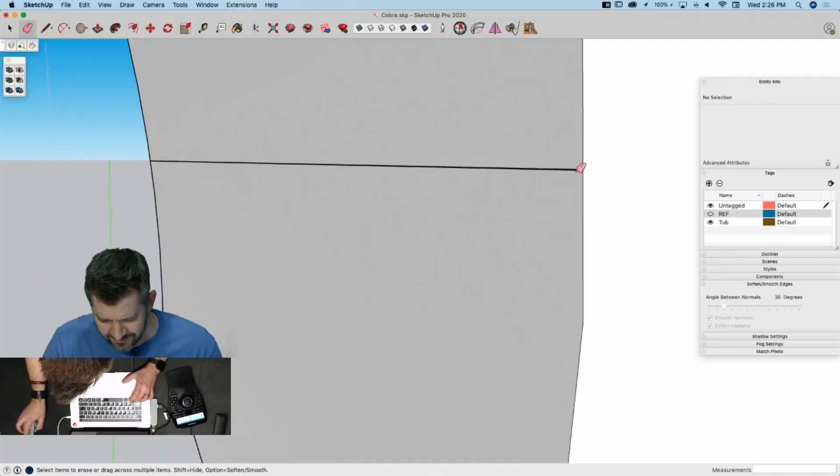Oh, you little monster. All right, show me my hidden and let me clean this up for good. There we go. All right, we're getting there.

All right, so what I can do now is I can grab all of this, make that a group, cut it, come in context with this group, edit, paste in place, and then I should be able to take that and just subtract it from... not a solid. Why are you not a solid now?

All right, I'm not doing this. I'm not fighting you. All right, so here's what I'll do. I'm gonna take this, all this geometry, reverse faces,

cut it, come in here, edit, paste in place, grab these two meshes. Man, whatever's going on is hurting me. Maybe we need to update my operating system on my laptop too.

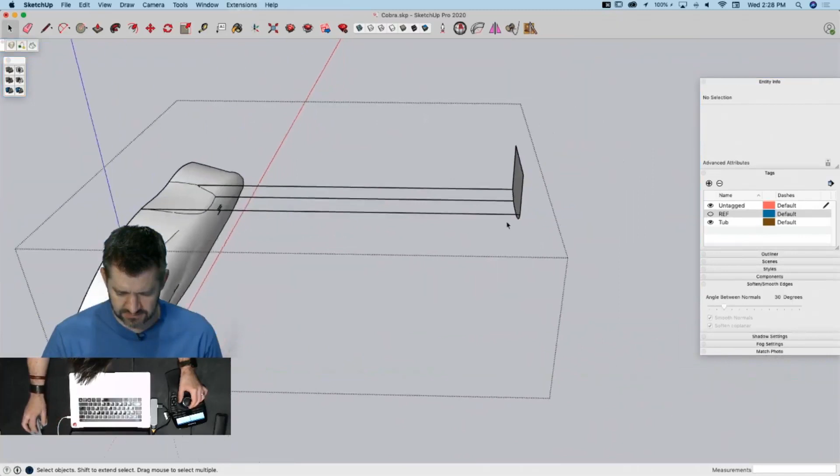it's not going to be perfect. I have a couple things here to clean up, but oh, so close. I only selected the face. I didn't select this piece right here to pull that through.

Oh, nuts. All right, I have to undo because I did that wrong. My laptop is a couple years old.

I actually have more than a few issues with it, to be honest. I'm not sure why, but it... there we go. It has some serious issues when I do things like shut it down or wake it up. So I'm hoping for a new one in the not too distant future.

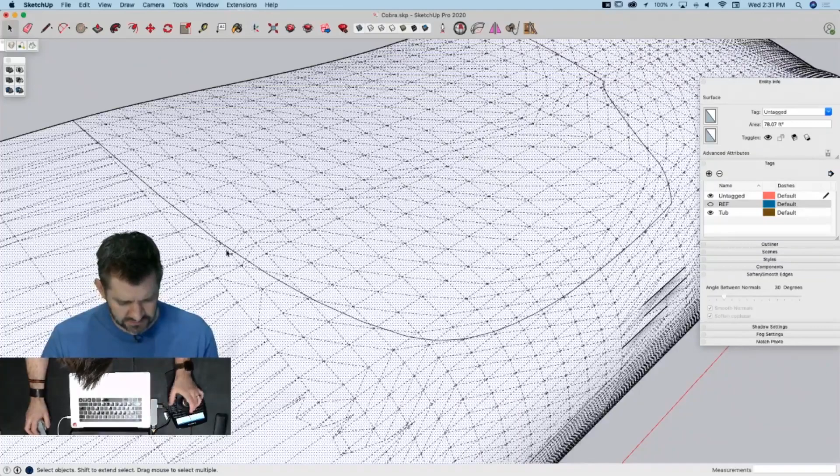And I have a feeling what's happening is that little spot that I was at just now, I think the lines just didn't quite meet up. So I'm just gonna come in here and see if that's enough to break it apart. Yeah, there we go.

Oh no, what happened to my surface?

Let's do this. No, it's not liking that either. It's not breaking it. Just want to get a little bit of... that worked.

All right, that's a little teeny bit of cleanup to do right here. So again, this joint right here was my problem. Do a group select like that, and look, I got an edge somewhere in that little tiny dot. So I'll delete that out altogether, and then just stitch this back up.

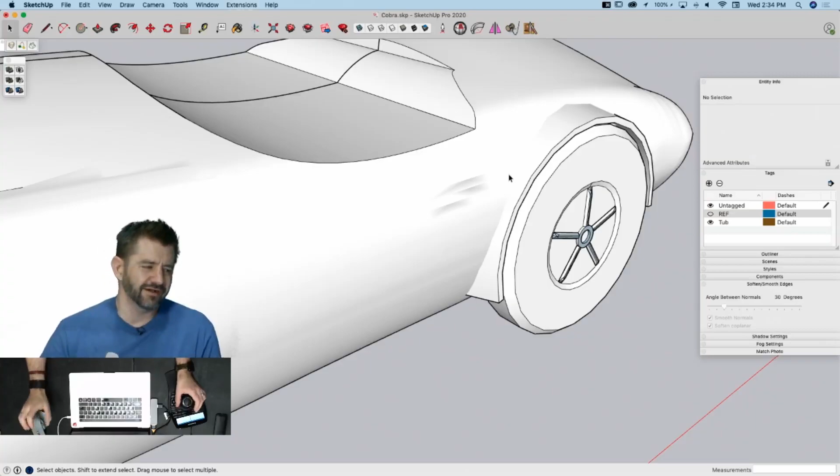And I will be far more conscious of the geometry I create, so we don't have a thing like what's going on right now. This is weird, I'm not sure what happened here either. Let's restitch this.

Okay, anyhow, there's my tub. So that's what we did in 2.5 hours. It's all right, we definitely hit our head on more than one bulkhead there. That was...

Yeah, Ryan's pointing out it's gonna be a nice square grandfather clock, no arc tools. Absolutely everything will be square. The face will be square. Oh man, that was definitely a fun challenge.

But this one totally fell into the thing I was talking about before, where having run through it once, I would have gone back and done some things very, very differently. There are definitely some pieces I would have done as different parts. I mean, in the grand scheme, I probably would have subdivided it after the fact. Now that we're looking at it.

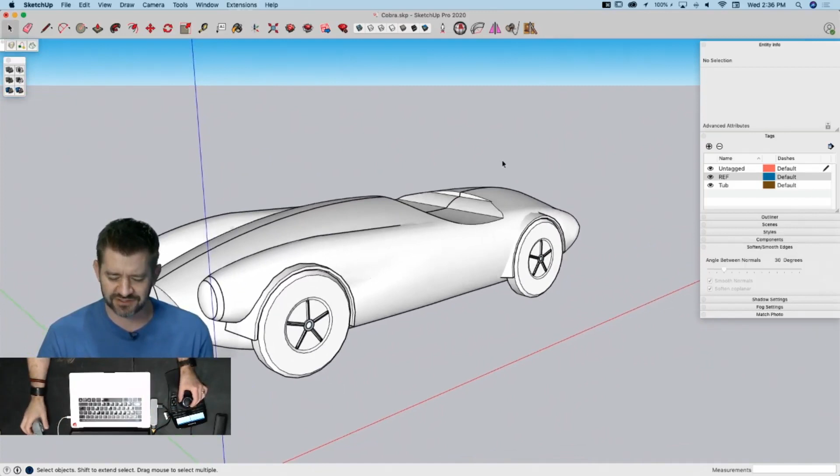And like I said, most of all, hopefully you guys got a little bit of relief, and hopefully this is a little pressure relief valve on the cabin fever if you are one of the many of us who are working remotely or solo.

Yeah, that's where I'm going to take it to today. I think it turned out okay. It's cool for a couple hours of modeling.